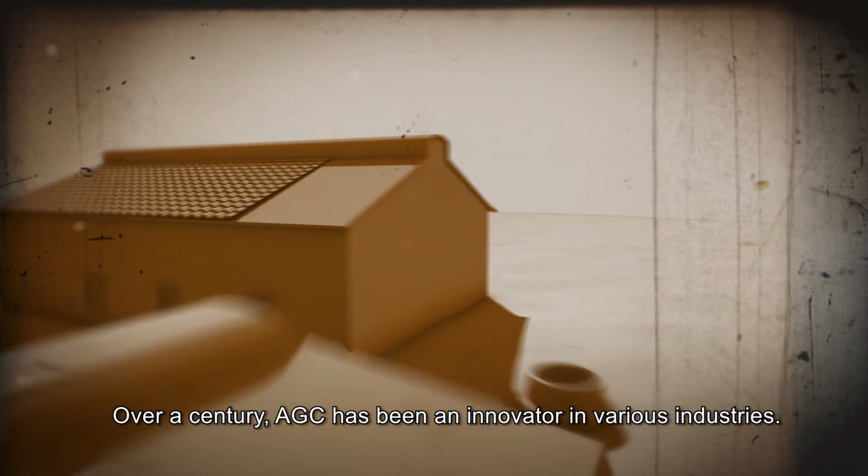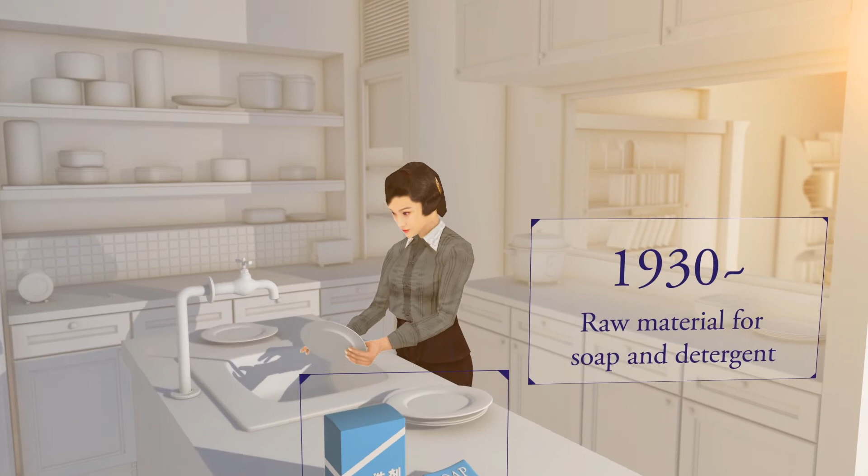Over a century, AGC has been an innovator in various industries. We've brought comfort to people's homes, entertainment into their lives, and we've been helping people get from place to place faster and safer. We have brought communities together with our products.

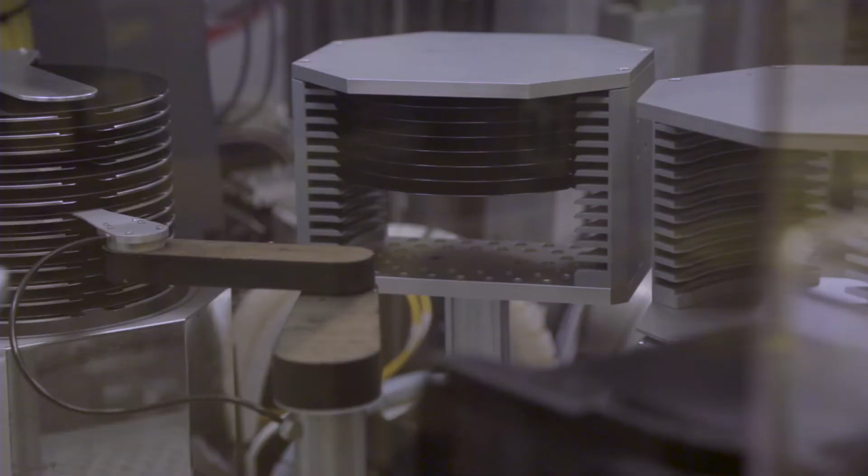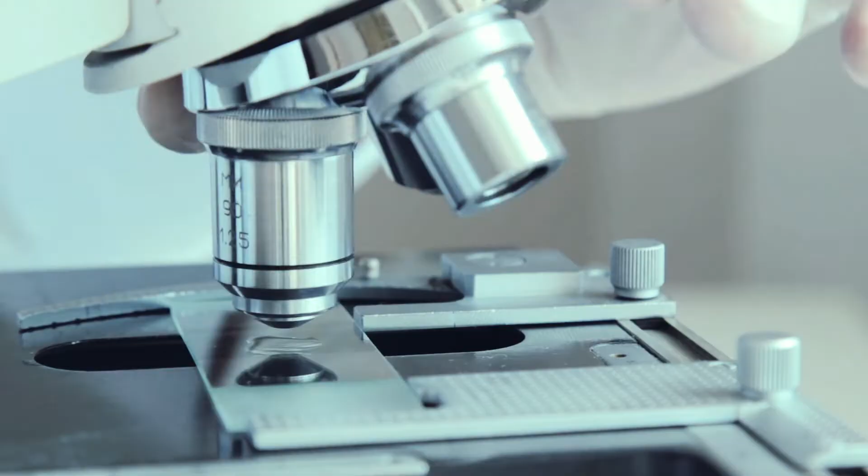We offer a wide range of materials such as glass, electronics, chemicals, and ceramics, and operate in over 30 countries and regions with over 50,000 employees, working to provide essential products for day-to-day life. Our research and development team strives to achieve a better society and standard of living.

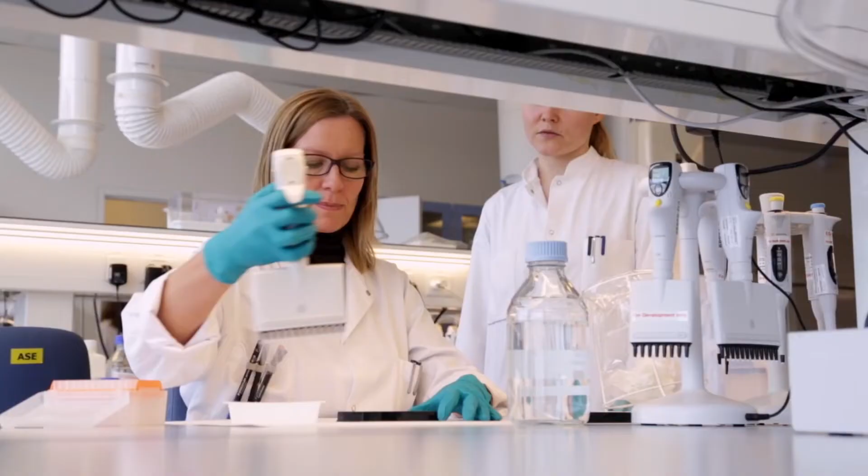At any point in time, AGC has played a part in supporting society, providing unique materials and solutions. Our glass is used in buildings and vehicles around the world. Our chemicals business offers a wide range from daily products such as baking soda to materials used for iconic buildings around the globe, furthermore providing solutions to advanced medical care and expected food shortage issues.

Our display glass enables clearer images. By utilizing a wide range of technology, AGC contributes to the development of the electronics industry. By providing unique materials and solutions, AGC is always around you, supporting people's lives anywhere in the world. AGC, an everyday essential part of our world.

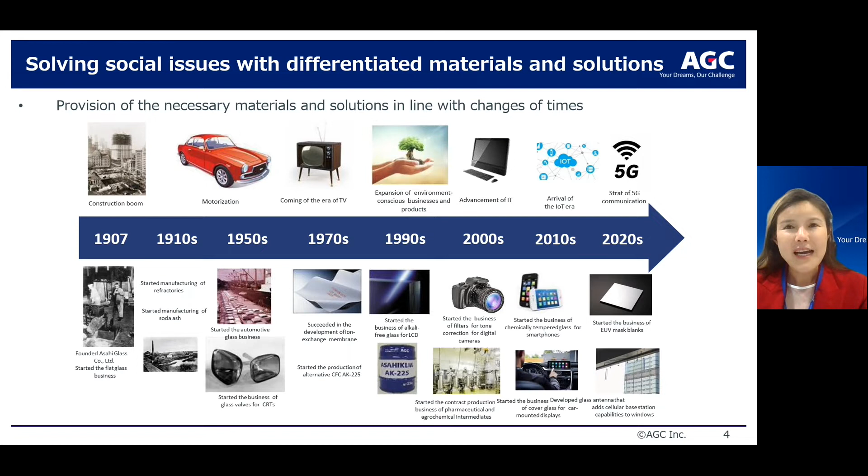Taking a brief walk through our history, since 1907 till date, AGC have provided innovative materials and solutions in line with the changes of time. We have since evolved from Asahi Glass Company, which started out as a flat glass business, to AGC Group, where we have since expanded our businesses to include electronics, chemicals, ceramics, and many more.

With the environment being integral to the company's shared values, AGC continuously and effectively utilize resources and develop products toward the realization of a sustainable global environment. Climate change and effective use of resources are 2 of the risks identified. AGC solutions and products are designed to address these issues, which will be explained shortly in today's explanation. Such efforts then contribute to the United Nations Sustainable Development Goals.

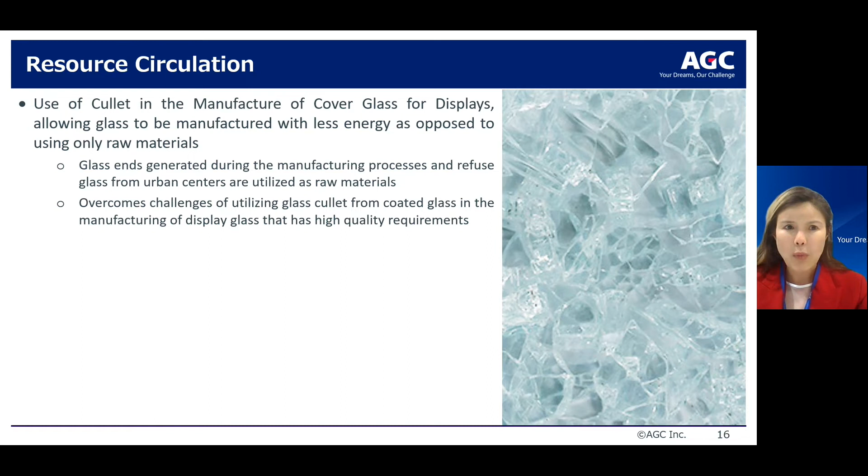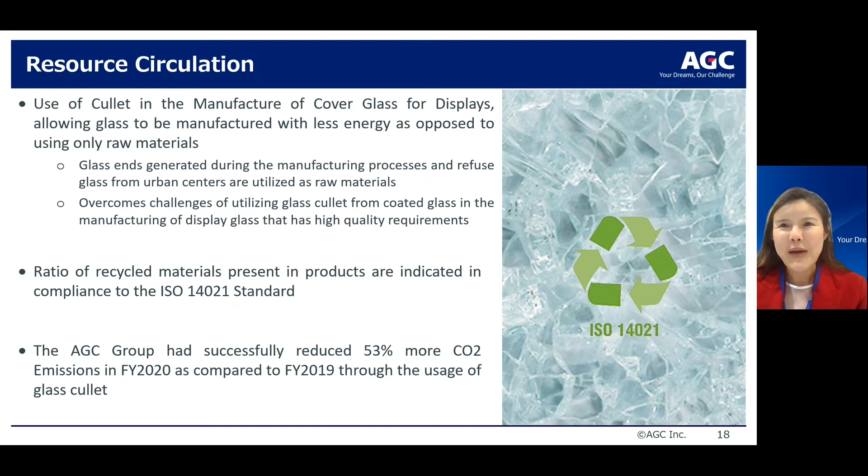The ratio of recycled material present in products is indicated in compliance with the ISO 14021 standard. AGC Group successfully reduced 53% more CO2 emissions in 2020 compared to 2019 through the usage of glass cullet.

Calcium fluoride is a natural resource used as a raw material to produce various fluorinated products. But the deposits and producing countries are limited. Most Japanese enterprises, including AGC Group, largely depend on imports from China.

Another key effort that AGC Group has undertaken is to recover used fluorocarbon products from customers and recycle them at AGC Chiba Plant, Japan. A byproduct generated from the destruction and manufacturing process is calcium fluoride.

We also recover calcium fluoride in the hydrofluoric acid, which is used in the wastewater treatment processes by customers. In recognition of these activities, AGC received the Minister of Economy, Trade and Industry Award in the Awards for Resources Recirculation Technologies and Systems in 2014 in Japan. In 2019, fluorocarbons equivalent to approximately 1.34 million tons of CO2 were recovered.

In the past, used refractories would be buried as waste. However, as part of AGC's key efforts to reduce the consumption of natural resources, refractories are now reused as aggregate raw material for monolithic refractories by removing impurities from refractories soon to be disposed of. A granular material is recovered after crushing and pulverizing.

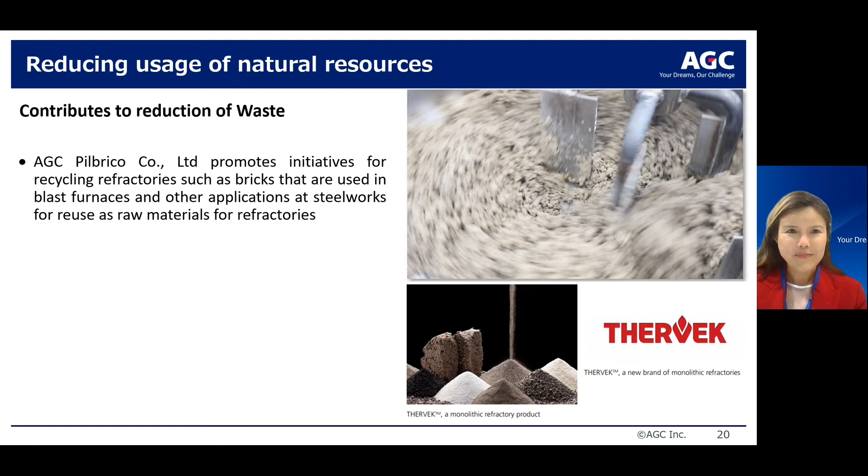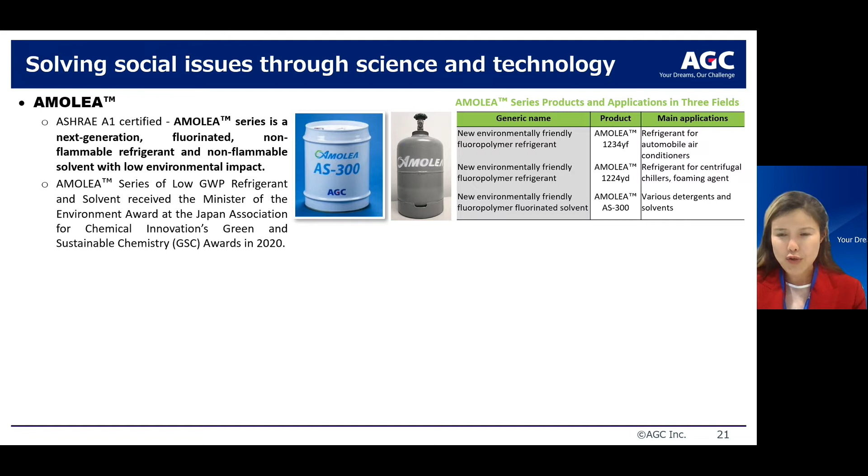In response to the need to balance realizing low global warming potential while maintaining energy consumption and energy conservation performance of refrigerants for air conditioners, AGC has created AMOLEA products that contribute to the environment. This AMOLEA is a next-generation fluorinated, non-flammable refrigerant and non-flammable solvent with low environmental impact while keeping high performance effect. AMOLEA series received the Minister of the Environment Award at the Japan Association for Chemical Innovation Green and Sustainable Chemistry Awards in 2020.

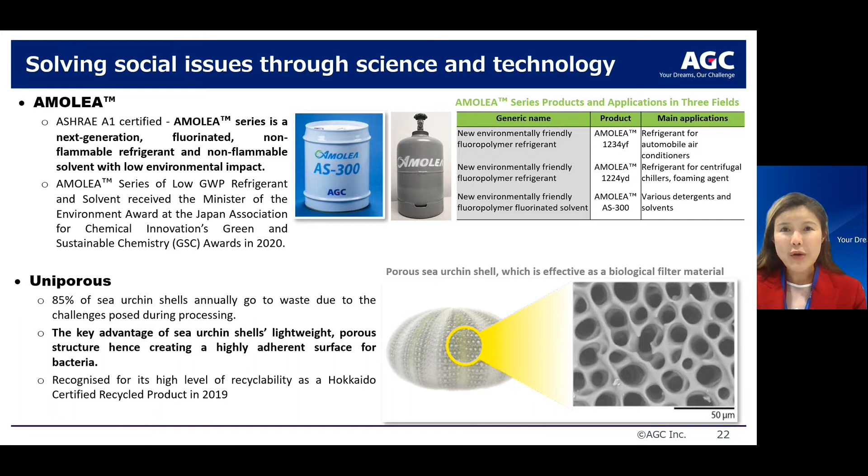Uniporous, on the other hand, is a biological filter made from sea urchin shells. 85% of shells go to waste yearly due to the challenge and time required during processing. We aim to resolve these social issues with cooperation from the Fisheries Research Departments of the Hokkaido Research Organization. Uniporous was recognized for its high level of recyclability as a Hokkaido Certified Recycle product in 2019.

In a bid to reduce freshwater consumption, AGC Group is promoting wastewater recycling alongside a reduction in clean water usage and wastewater through water filtration. As part of our efforts to prevent water pollution, we have established wastewater control targets tailored to the characteristics of each site.

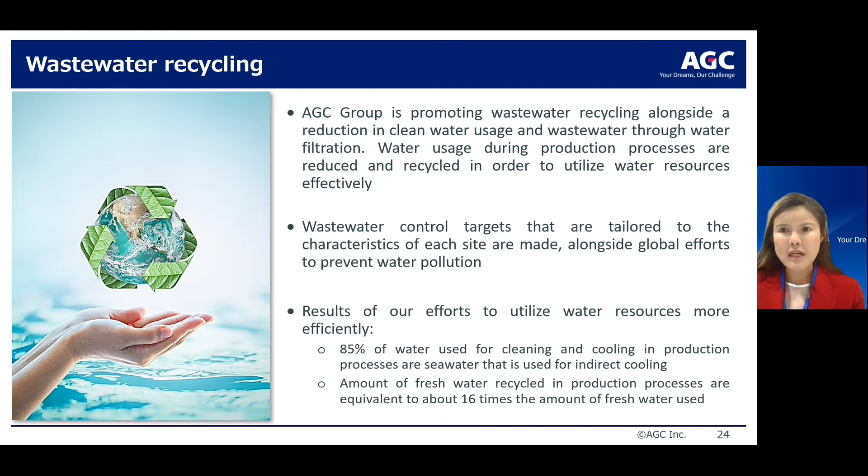These are the results of our efforts to utilize water resources efficiently. 85% of water used for cleaning and cooling in production processes is seawater used for indirect cooling. The amount of freshwater recycled or cascaded in the production process is equivalent to approximately 16 times the amount of freshwater used.

AGC Group has long been proactively carrying out a wide range of energy-related activities, one of which is the photovoltaic power generation project to realize energy saving and creation at AGC plants and office buildings. In 2020, 5.05 million kilowatt-hours of power was generated by solar panels installed in Europe, and 25,000 kilowatt-hours of power was generated by solar panels installed in Japan.

AGC's subsidiary has also installed a biomass boiler to provide steam to its plant's production line. These activities contribute to the AGC Group's efforts in utilizing renewable energy worldwide.

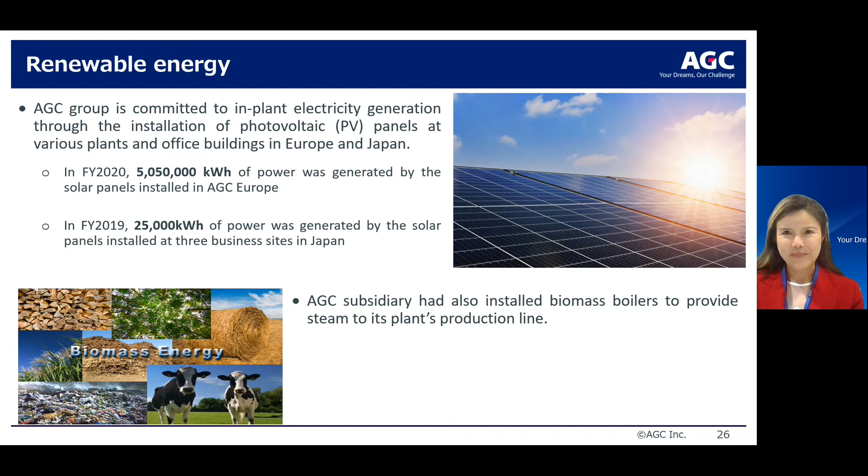In summary, as part of AGC's commitment to creating a sustainable future, we have outlined the fundamental approaches as follows. Number one, establish a long-term goal of achieving net zero greenhouse gas emissions by 2050. Number two, promote zero landfill and continue steady progress to reduce the amount of waste generated. Number three, expand the promotion of renewable energy at business sites of group companies. Number four, proactively promote energy conservation in manufacturing processes. Number five, introduce cogeneration systems to maximize the use of energy. And lastly, provide products and solutions that contribute to energy savings and generation, also contributing to the mitigation of climate change overall.

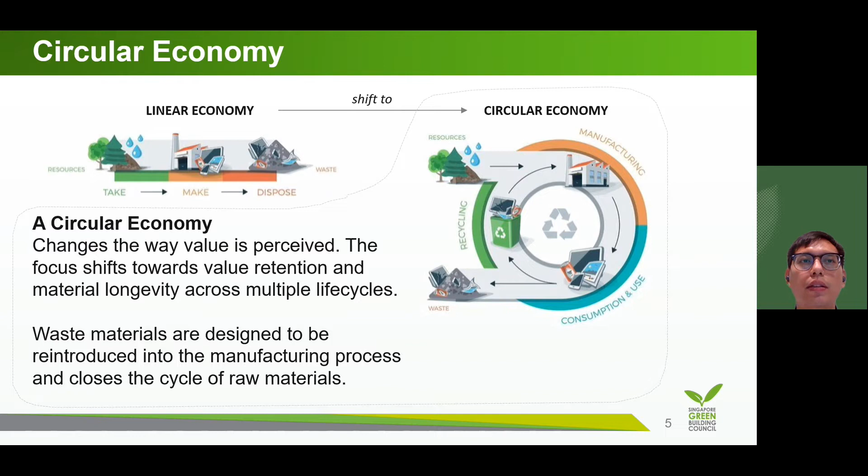But let's move on and discuss what a circular economy model is. Circular economy changes the way value is perceived. The focus shifts towards value retention and material longevity across multiple life cycles. How do we do this? We do this by using waste materials and reintroducing them into the manufacturing process. This actually closes the cycle of raw materials and extends the lifespan of materials.

I like this picture on the right because it paints a more realistic picture. After manufacturing and the use stage, any materials that can be recycled are reintroduced back to the manufacturing stage. But this picture realistically shows that a certain amount of waste has to exit the cycle, and a certain amount of fresh raw materials and resources have to enter the cycle. So the big question for us is: how do we maximize the amount being recycled? How do we minimize the amount of waste exiting the cycle? And how do we minimize the amount of fresh resources entering the cycle?

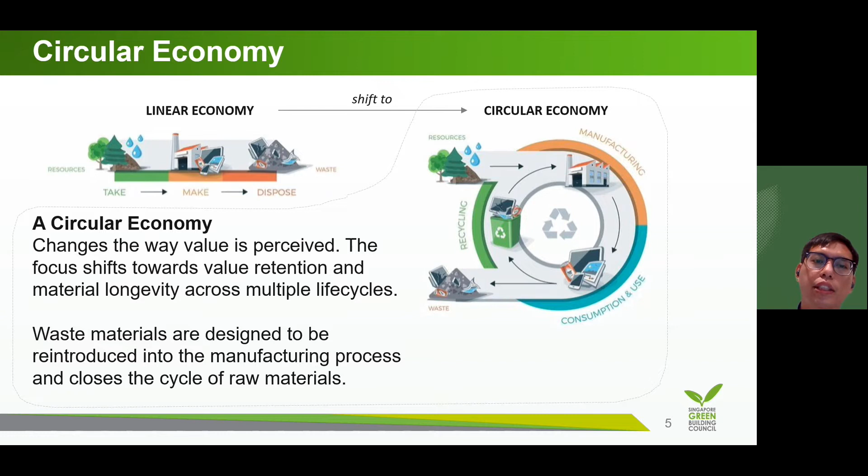So this is the big challenge of circular economy, and it's all to address these purposes: resource scarcity, keeping resources in use, giving them multiple lifespans, and using them more efficiently. In doing so, we reduce waste and reduce environmental impacts.

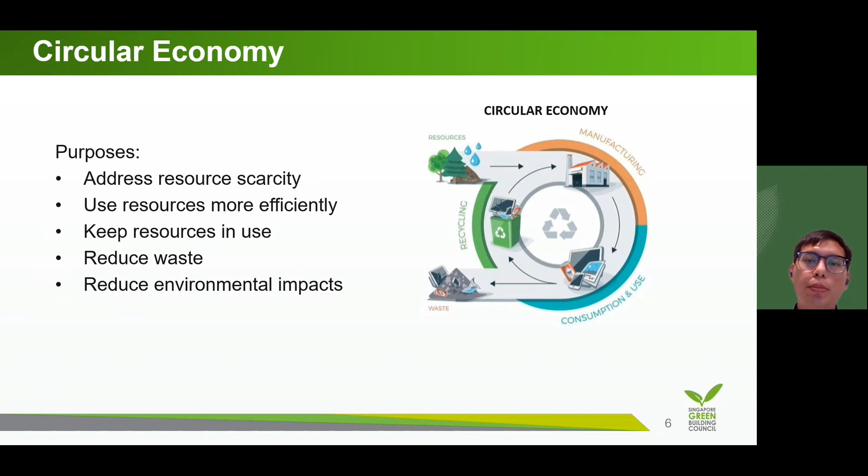So NEWater was actually launched in 2003, for any used water from households and industries.

This water is actually reclaimed and captured before being purified through a three-step process. The purified water at the end of it will be reintroduced into Singapore's water supply.

This caused quite a stir when it was first launched. Used water also refers to human excretion or urine, so it was a big item of debate. Much of the population was skeptical, some were fearful, some were disgusted, but we have gone through many stringent tests. It is actually of the highest purity.

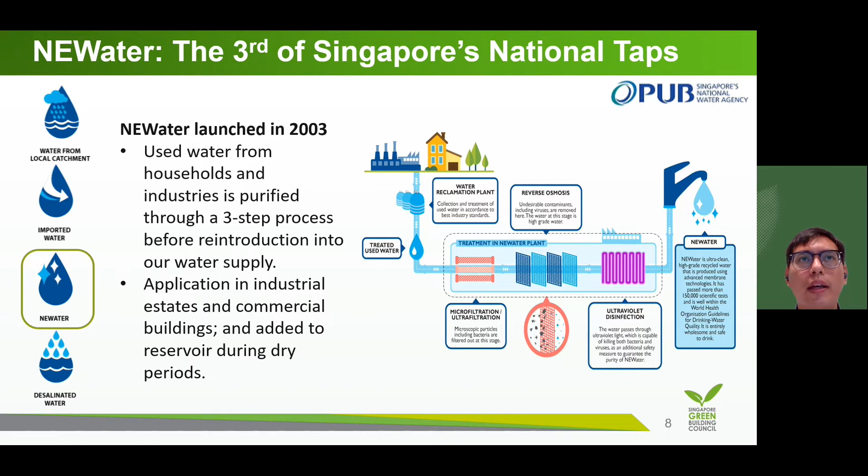How important is it? Today, the daily use of Singapore's water is about 430 million gallons per day. NEWater can account for up to 40% of that demand, and desalinated water about another 25%. 50% of it comes from imported water, like I was sharing, through our agreement with Malaysia.

The balance comes from our local catchment. For us, this is a very strategic national resource. We are putting up capabilities to further refine and improve the NEWater and desalination processes. By 2060, we target for NEWater to meet 55% of water demands and desalinated water to meet 30% of water demands.

2060 is a very critical date because the water agreement we have with Malaysia actually ends in 2061. And for those who are more politically inclined, following the news in our region, historically this has been a very, let's say, tricky situation between Singapore and Malaysia. So apart from meeting circular economy goals, this item is also one of national importance to talk about.

self-reliance and ensuring that we have our own form of water supplies. So you can see that NEWater improvement is about 15 percentage points versus desalinated water's 5 percentage points. The reason for this, I think, is what we discussed earlier - circular economy, how to minimize the amount of fresh resources being introduced.

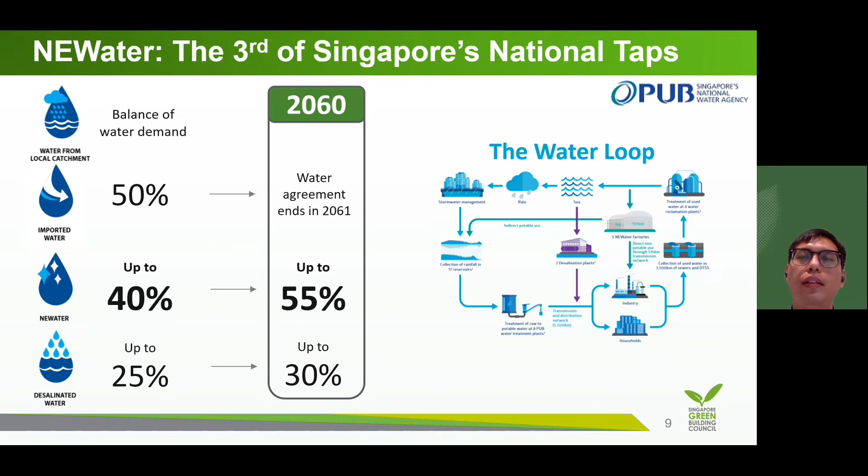Comparing against a baseline of treating rainwater from our local catchments, the energy used for desalinated water is actually about 17 times that. In comparison, NEWater is only about 5 to 6 times that. So this is also another key reason why NEWater is a better case study - we not only address the circularity aspect, we also address the use of fresh resources entering the cycle.

So I hope that paints a nice picture for the water aspect. Let's move on to case study 2, recycled concrete aggregates.

Recycled concrete aggregates are raw materials used in the production of cementitious and concrete products. You have your OPC, ordinary Portland cement, you mix in concrete aggregates, concrete fines and other things to produce concrete. With recycled concrete aggregates, we don't need to use as much raw or virgin aggregates. Before we jump into it, let's talk a little bit about the demolition protocol in Singapore.

The demolition protocol is part of the Singapore Standard 557, 2010 edition, Code of Practice for Demolition. It's been around since 2002 under a different name, but the key items here are the pre-demolition audit, the sequential demolition, and the site waste management.

When a building is identified for demolition, we actually have to conduct an audit or inventory stock-taking in order to identify what materials are reusable, what materials are recoverable, how much has been contaminated, and what has no choice but to be disposed of. These materials include things like pipes, wiring, concrete, bricks, and so on and so forth.

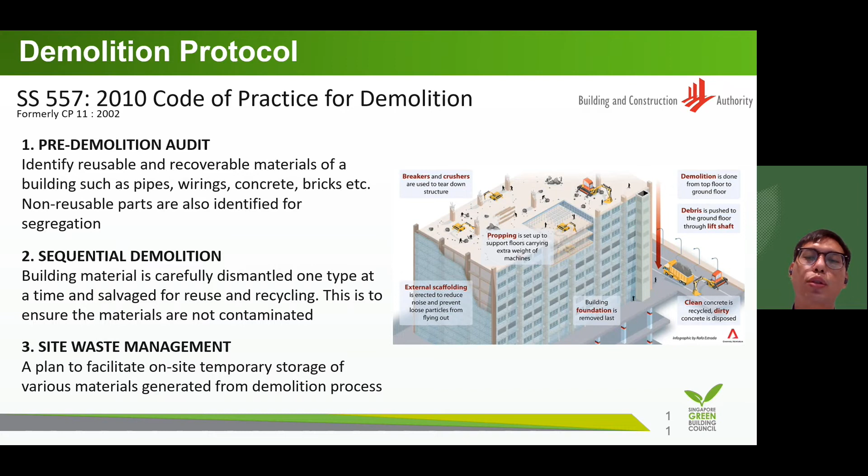So you can imagine, in terms of the concrete debris that comes from all our demolished buildings, these can be collected, compiled, and then transported to treatment facilities. Over here at treatment facilities, they are broken down through things like excavators and jaw breakers. And at the end of this breakdown process, we can screen, segregate, and come up with aggregates and fines.

So like mentioned, these aggregates and fines are actually raw materials in the production of concrete and cementitious products. Initially, when we first derived such material, we used them in roads and other non-structural concrete product applications, whereby structurally it's not as significant.

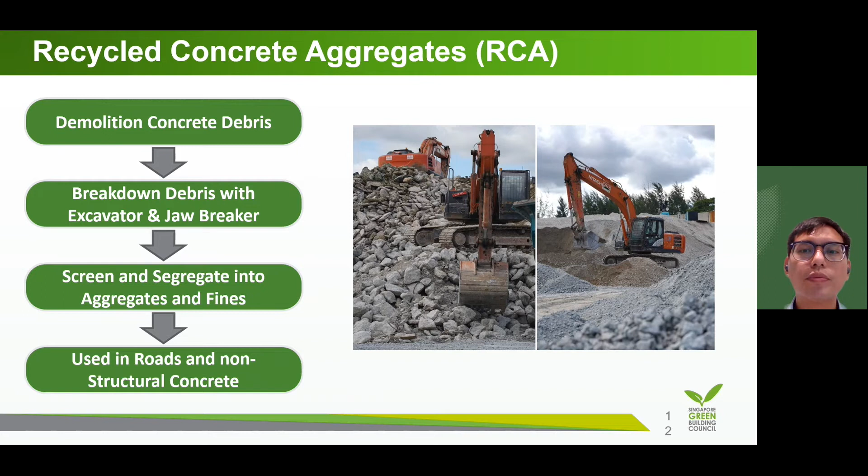But we didn't stop there. We took it one step further. We thought to ourselves, how can we incorporate RCA, how can we make better use of it, maximize the efficiency of this raw material. And all that thinking and questioning led up to the Samwoh Eco-Green building in 2010.

So Samwoh is a local company. They are builders, involved in construction. And what they did was lead a research project in collaboration with public agencies and institutes of higher learning - that is the Ministry of National Development, the Building and Construction Authority of Singapore, and Nanyang Technological University. So multiple stakeholders were involved in this research project, and what they focused on was evaluating the performance of concrete that contains recycled concrete aggregates.

So one of the key findings is that if you compare traditional concrete versus a concrete that contains RCA, there actually is an insignificant amount of differences. When they looked at the structural monitoring results as well, the deformations that the RCA concrete shows fall within theoretical deformations. So these were all very good findings, and the study concluded that RCA concrete can be designed for structural applications beyond the roads and non-structural products we've talked about before.

So from this point, Samwoh brought to reality the findings of the study. The Eco-Green building is constructed using RCA concrete. So any of the cementitious or concrete elements found in this building are actually not your typical concrete - these are RCA concrete instead. And in certain cases, the aggregates used would be up to 100% recycled concrete aggregates, so zero use of fresh virgin aggregates in those cases.

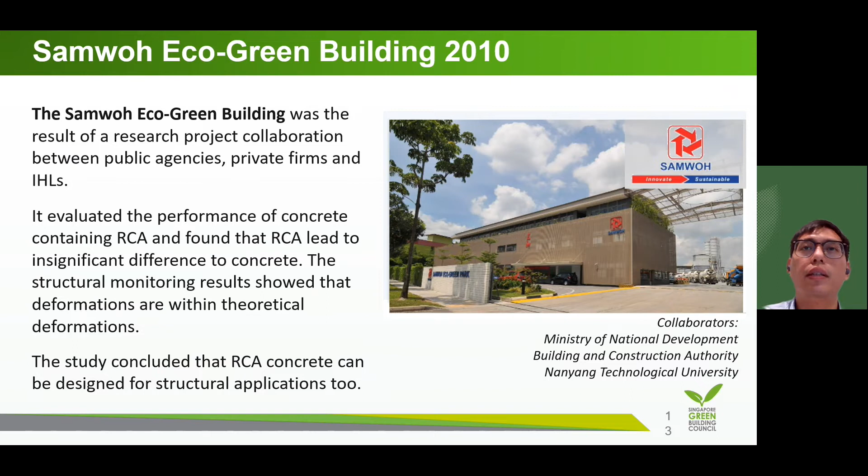So I hope this has painted a nice picture for Singapore's application of circularity principles in the water sector and the use of RCA. Now let me move on to the resources aspect of this webinar series and the use of environmental product declarations. I started with circularity first because although it is a very good thing, the thing of the future, we need to bear in mind that unlike water, unlike RCA, not all products or product categories can make that jump to a circular economy model so rapidly or so quickly, right?

So we're stuck with a lot of products that's still in the linear economy model. The thing is, we can't not care about them, we can't leave them aside. We have to ask, how can we improve this, right?

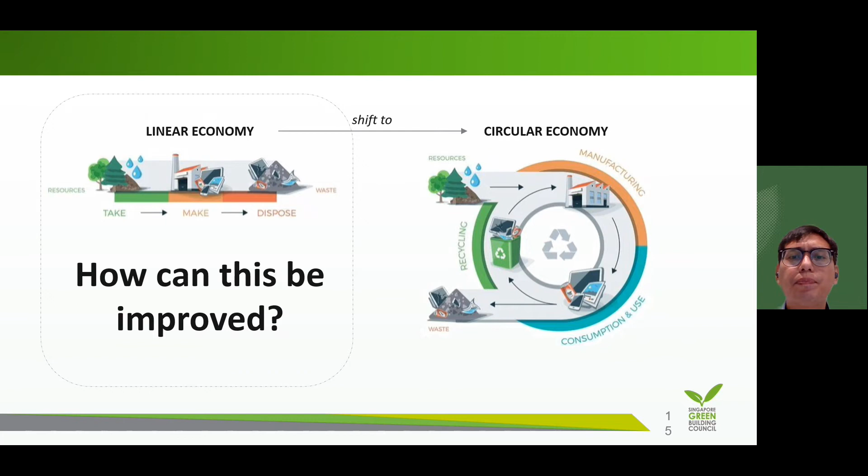So compounding on this question, we also talk about carbon emissions of the building sector. Globally, buildings account for 39% of global carbon emissions, and it is a building challenge, a mega trend, a carbon mega trend, right? And we've talked about buildings, we can further break them down into embodied or upfront carbon versus operational carbon.

Even locally as well, Singapore is doing a lot from a government standpoint - a lot of schemes, a lot of initiatives, and even putting into regulation the need for higher energy efficiency of buildings. In comparison, the upfront carbon is a little bit overlooked.

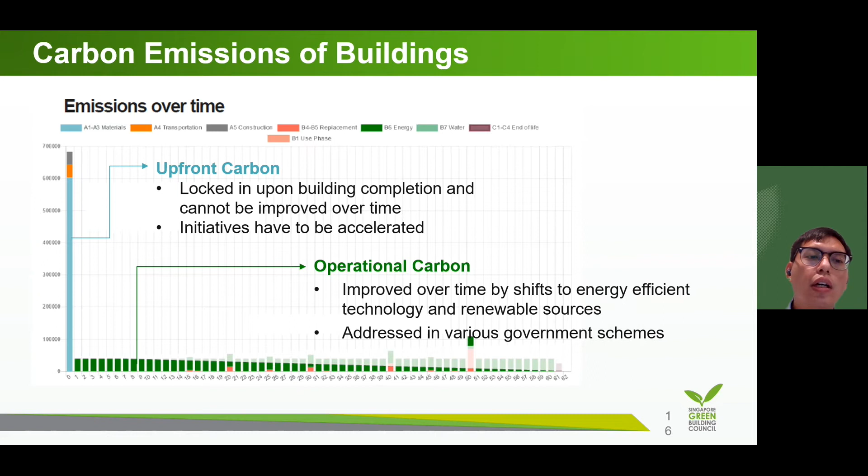So this is where EPDs, or environmental product declarations, come into the picture. EPDs are like healthy food labels that report on the sustainability impacts of products. So instead of things like fat amount, sugar amount, or carbohydrate and protein amount, EPDs tell us about the environmental impacts of products, such as acidification, ozone impacts, GWP, and so on and so forth.

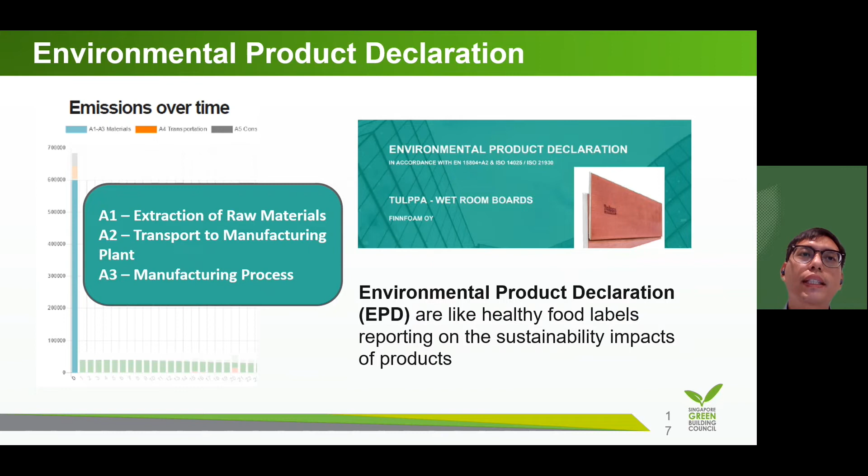What we want to address in terms of the embodied carbon side is these 3 stages, also referred to as cradle to gate: the extraction of raw materials, the transport to the manufacturing plant, and the manufacturing process itself. So EPDs are able to give us a deeper picture of the carbon emissions associated with these 3 stages of products.

So in this case, if you have, let's say, 2 carpet products, if you take a look at the GWP of each of them, you can actually use it to make a comparison to say which of these carpets have a lower carbon impact, and you can make a selection from there.

So going back to the analogy of healthy food labels, if in that category you are a dietitian or a chef, you can choose your ingredients to make a meal out of. Similar to that, as a project team, an architect or ESD designer, you can choose the materials that go into your building project that have the lowest amount of carbon impact. At the same time, suppliers, when they review their products and maybe compare them against competitors, can find out where the room for improvement is in their processes and product design.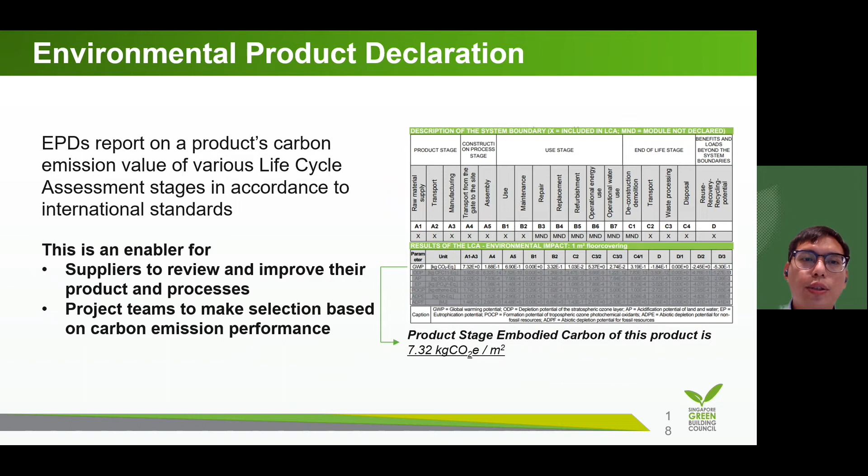So this is a very quick snapshot of environmental product declaration. I can go into a lot more detail on that. SGBC is advocating for the use of EPD locally, but due to time constraints, this is all I have for today's sharing.

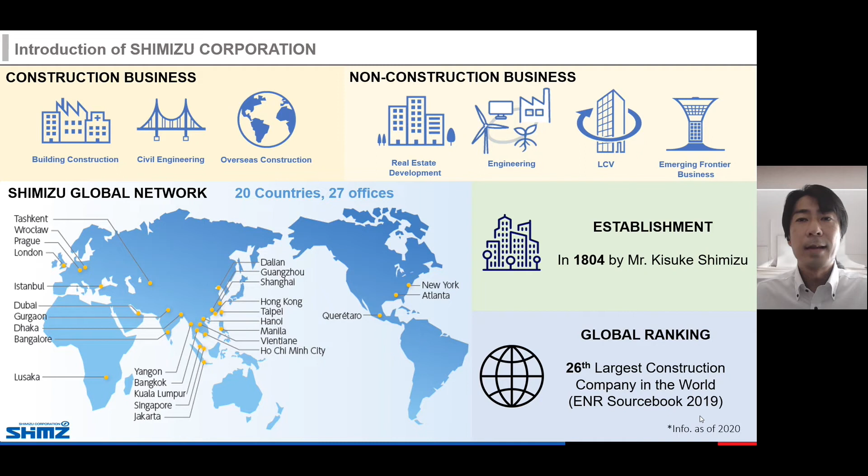First, I'd like to introduce Shimizu Corporation. Shimizu's main business is building construction and civil engineering, with branches in 20 countries. Shimizu was founded in 1804, 218 years ago. As of 2020, we are the 26th largest construction company in the world.

Shimizu Beyond Zero 2050 is our target to create a sustainable society, providing positive environmental value to customers and societies that extends beyond zero negative impact from the company's own business activities. Shimizu Group will create a wealth of environmental value through an innovative approach from three perspectives: zero carbon society, resource recycling society, and a society that coexists harmoniously with nature. We are not questioning ourselves if we can achieve this or not, but we are committing ourselves to achieve net zero emissions, final waste zero, and zero negative impact on the environment by 2050.

Zero carbon society: it is our responsibility to eliminate CO2 emissions by 2050. Since 2005, we have set CO2 reduction targets to tackle middle-term and long-term effects. As a design and build contractor, we contribute by designing buildings with this aim, driving society towards zero carbon with technological innovation and generating power from renewable energy.

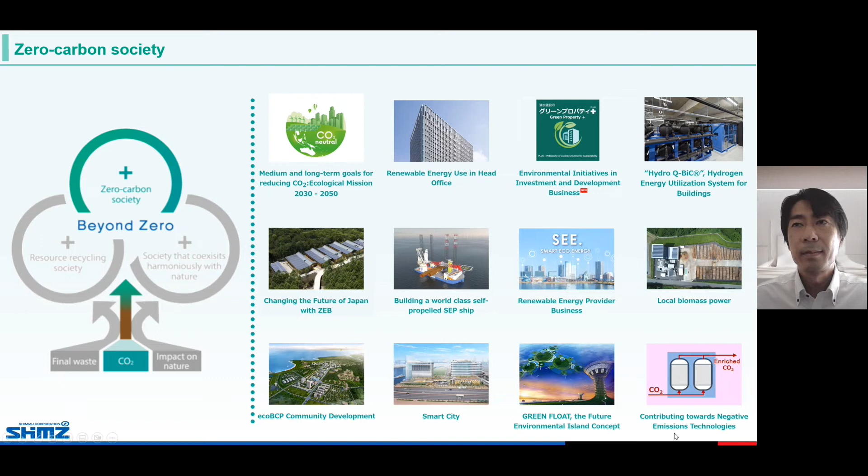Society that coexists harmoniously with nature. The construction industry tends to be perceived as having a negative impact on the natural environment, such as land development and deforestation. By 2050, we aim to quantify the impact and accomplish zero negative impact. To achieve this, we will keep a rich environment that has a positive impact on biodiversity for future generations by introducing green infrastructure, utilizing the diverse capability of nature in various ways.

Resource recycling society: we aim to achieve zero final waste generated by our own business activities by 2050, including construction and office waste. We continue to work on recycling society resources through the entire construction life cycle, from material procurement to dismantling. Today, I'd like to introduce actual applications of environmentally friendly temporary construction material and resource recycling and waste reduction.

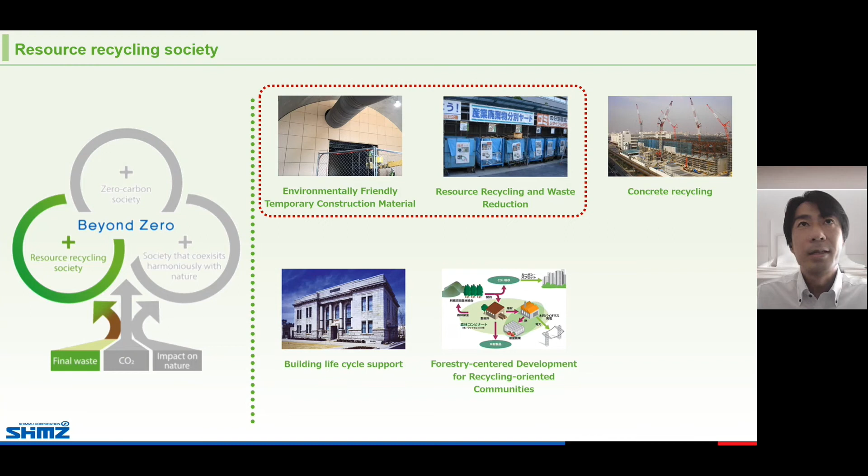The environmentally friendly temporary construction material I would like to introduce is Kamiwaza. Kamiwaza is a solution for temporary construction materials at civil engineering sites that uses paper materials made from waste paper and pulps. It was jointly developed with Oji Holdings Corporation. The main product of Kamiwaza is HiPLE-ACE. This product has advantages of easy transport, flexible shapes, space saving, environmentally friendly, high weather resistance, and high rigidity and strength.

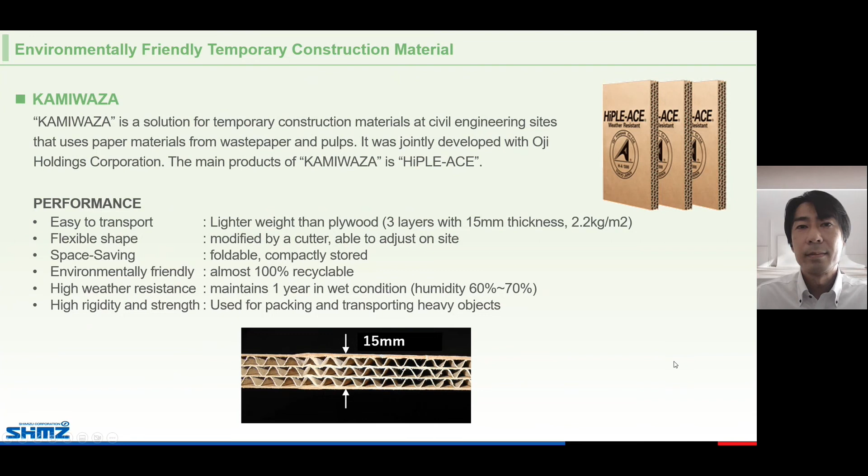This is an example of actual application of HiPLE-ACE. In tunnel construction, we install a windbreak facility called a windgate to prevent outside air from rapidly entering. The conventional windgate is made by inflating nylon balloons, which requires a lot of sequence of work, man-hours, and cost. Thus, we adopted HiPLE-ACE, which has the required strength and is lightweight.

Work efficiency has been improved by pre-cutting and crease processing, with a simple mechanism that just fits the HiPLE-ACE with an L-shaped cut for hooking on the scaffolding. It can be fixed easily and securely. In addition, since the shape and dimension of each tunnel are different, the conventional balloon needs to be disposed of, while the HiPLE-ACE is recyclable, and the shape can be easily adjusted.

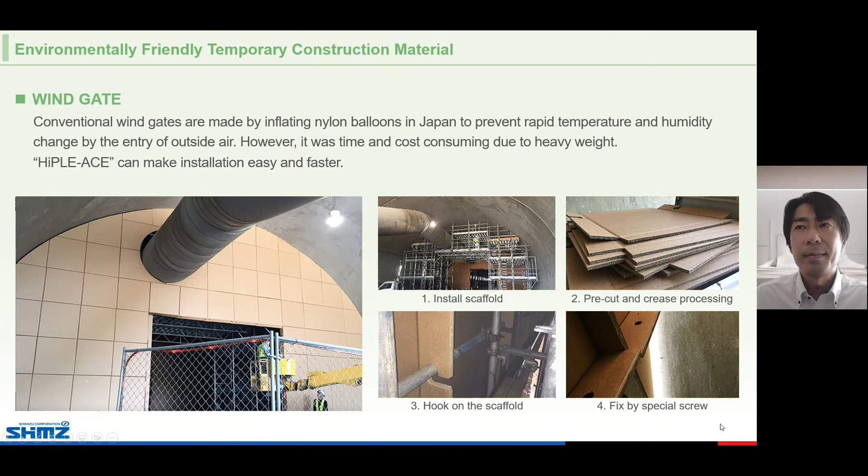Since HiPLE-ACE is a cardboard material with a 3-layer structure, which includes an air layer inside, it has high sound insulation performance. Hydraulic pile hammers generate large noise, and even with a soundproof cover installed, sufficient effect has not been obtained due to sound leak from the opening. Thus, we devised an opening-closing cover that takes advantage of the sound insulation and workability of HiPLE-ACE, designed to minimize the gap between HiPLE-ACE and the outer soundproof cover. Measuring the noise at a position 30 meters away from the hydraulic pile hammer, the noise was reduced by about 5 dB. In particular, in the frequency range of 1 to 4 kHz, the maximum reduction effect was 9 dB.

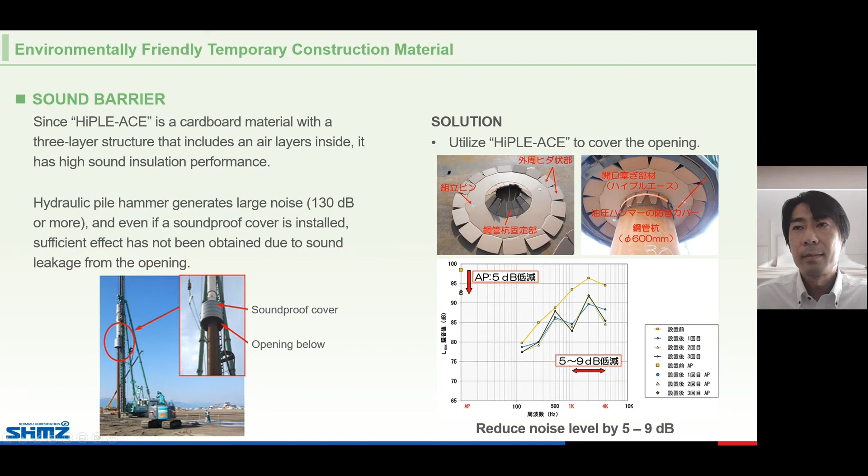On job sites, we plan and promote 4R activities. 4R consists of the initials of 4 words: refuse, reduce, reuse, and recycle. For example, requesting product delivery with a packageless method, pre-cutting at the factory, and bringing waste material to a manufacturer for recycling products.

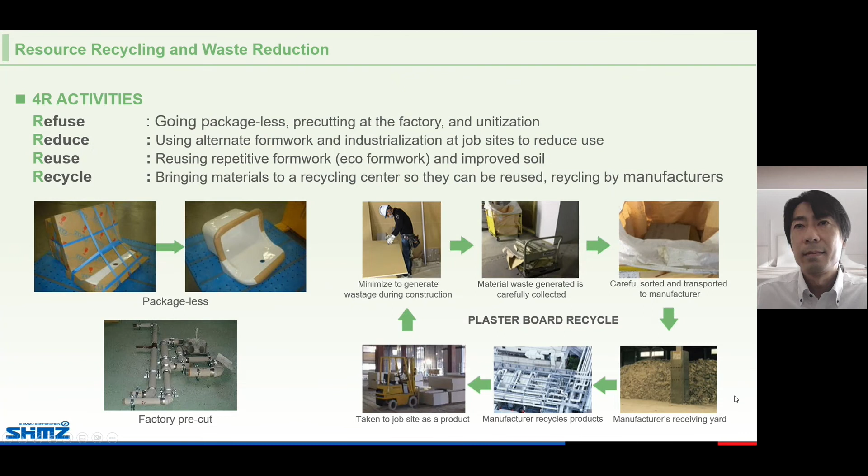There's one project in Japan promoting high recycling construction. With a large-scale renovation work of an existing facility in Tokyo Big Sight, the existing exhibition hall would be unavailable to use for 10 years. Thus, a temporary exhibition facility was planned to set up a system in which events can be held continuously. We were selected as a design and build contractor after the open tender with a comprehensive evaluation.

As the building is to be demolished in about 10 years, we proposed minimizing the environmental impact during construction and demolition, and an eco-friendly building with a high recycle rate.

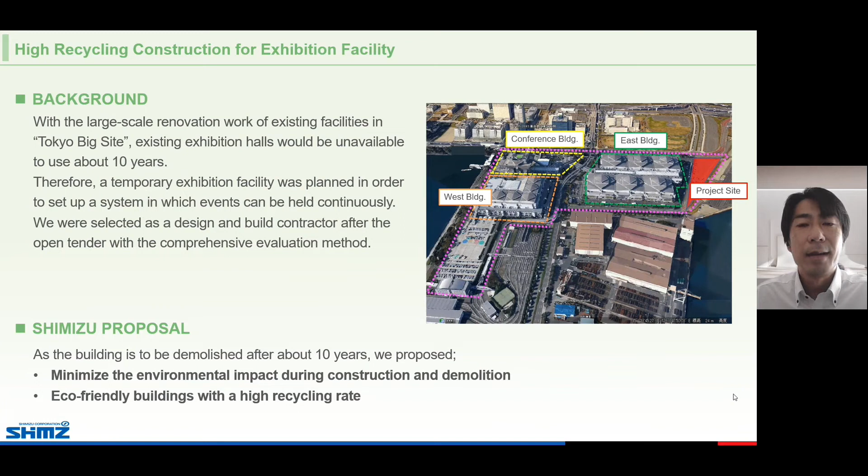Here is the project outline. Location: Tokyo, Japan. Construction schedule was November 12, 2015 until October 9, 2016. Building use was exhibition hall. Total floor area: 19,905 square meters. Building height: 16.4 meters. Two-story building, superstructure by steel structure. Foundation: pile foundation, with metal roof and external wall of ALC panel.

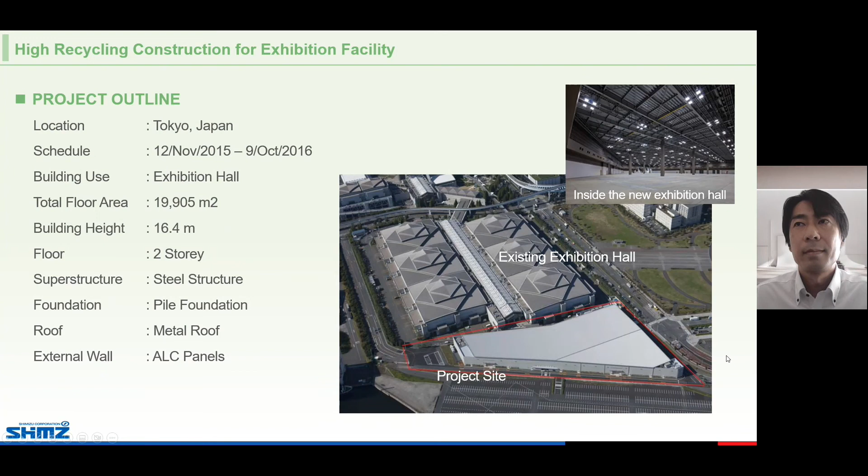Total construction period was 11 months. We constructed the roof and external wall in advance prior to the slab casting and subsequent finishing and M&E works, so that noise and dust could be minimized. By following the reverse sequence, a similar effect could be expected during the demolition work in future.

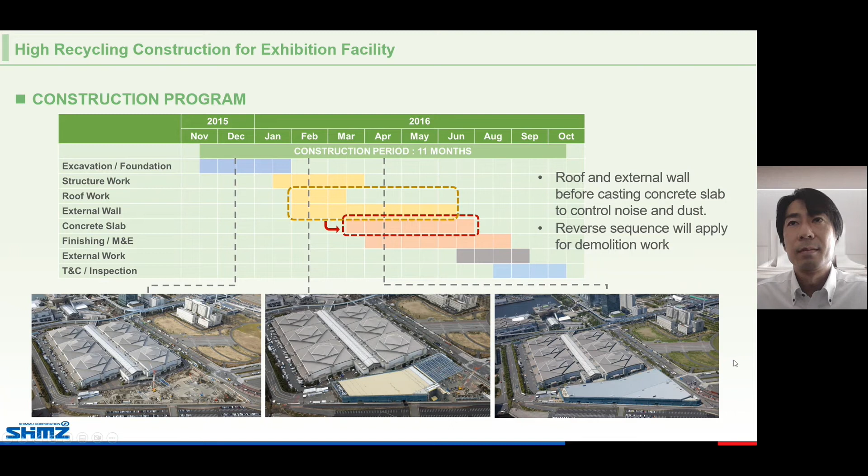This rotary press-in steel pipe pile is a method in which steel pipes are pressed in while rotating, and they can be easily pulled out by rotating them in the reverse direction when dismantling in future. This is an environmentally friendly method that minimizes noise and vibration and generates less waste. The use of steel pipe piles also allows us to reuse and recycle 100% of steel pipes after they have been pulled out.

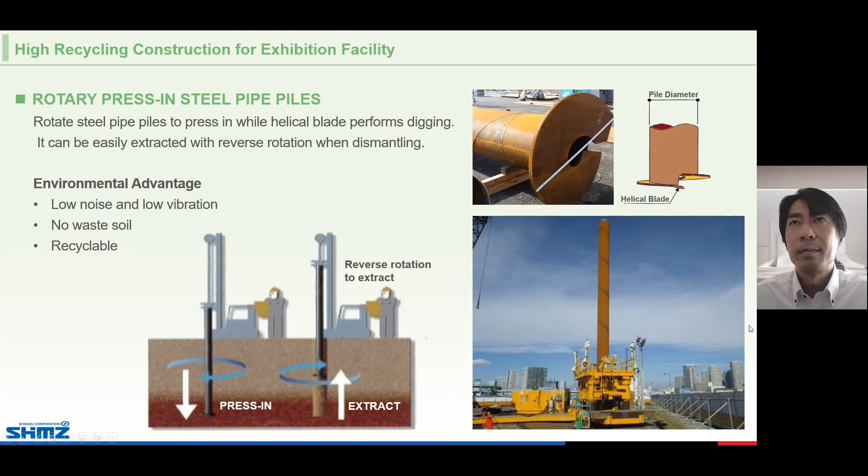The pile head ring socket construction method is our unique patented construction method. This method surrounds the steel pipe pile and steel column base with ring sockets, filling the gap with concrete to integrate them. Stress at the bottom of the column is carried by the pile so that ground beams can be omitted. As a result, the volume of excavation soil and concrete can be reduced, resulting in reduction of CO2 and waste.

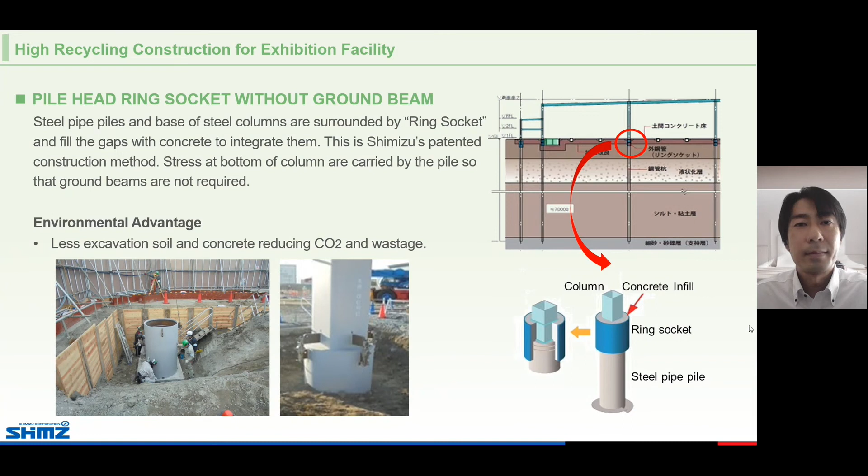2,650 tons of steel frame of the wall are designed as a hanging structure to cope with ground settlement. 8,760 square meters of external wall are formed with ALC panel and metal cladding. 17,000 square meters of roof is double layer metal roof with glass wool sandwiched in between.

All the materials selected for the superstructure are recyclable, while satisfying the strength and resistance of building standards. The structure was designed as simple as possible to ease dismantling work.

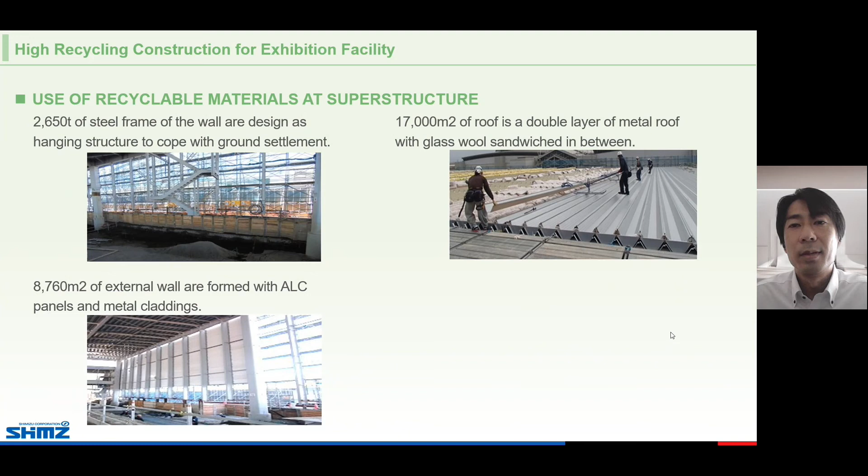We encourage suppliers to deliver products with cage trolleys to reduce packaging. Pipes and M&E equipment are prefabricated together with steel frame in a factory to deliver with minimum packaging. By simplifying packaging, we are able to reduce CO2 emissions and industrial waste.

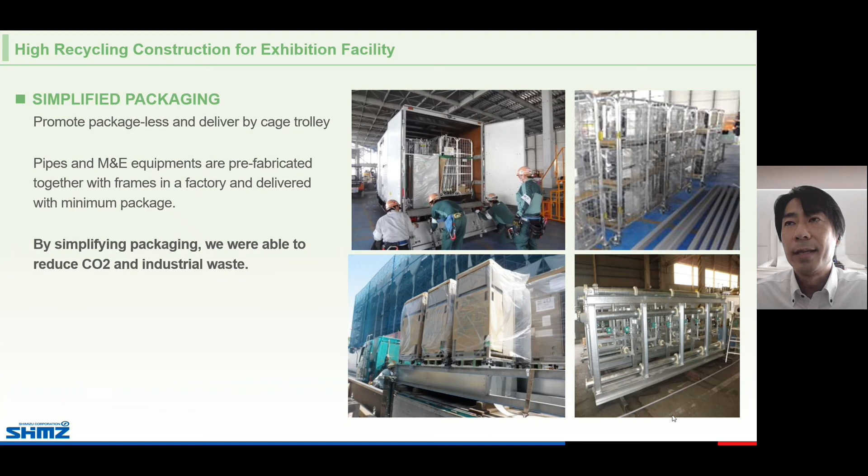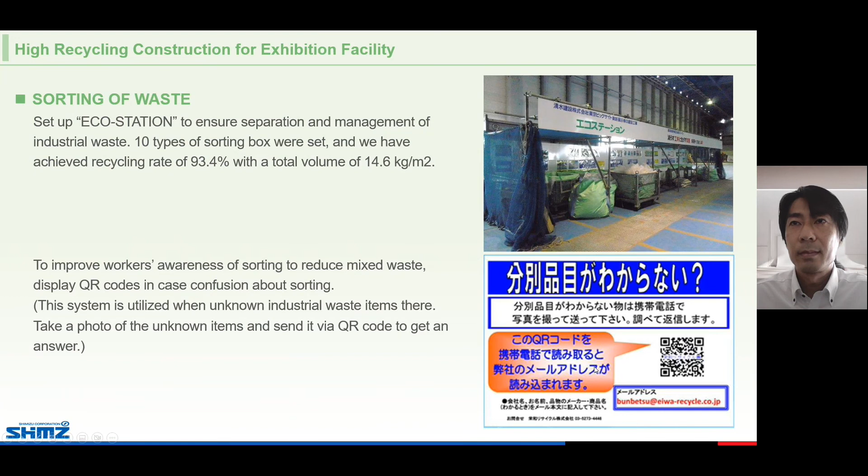Today, I could only introduce a part of our activities. From our activity, SHIMZ aims to contribute to a positive world that achieves beyond zero. That is what we want to build for people living now and the children who have a right to thrive in future.

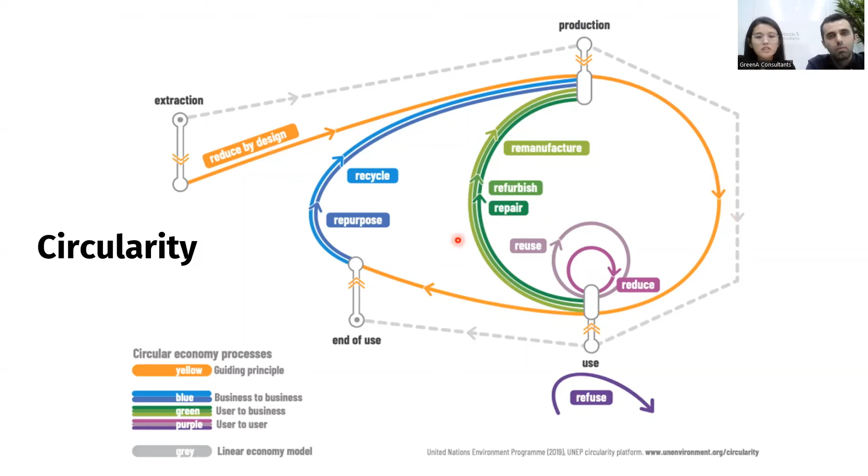Circularity is a term often heard in the field of sustainability. In the traditional whole life cycle of products, they actually enter a linear economy model where raw materials are extracted, manufactured, processed, distributed, and then used by the end consumer, after which they are thrown away and incinerated. This is wasteful because most products are still in good condition or are only used for a short period of time. Fortunately, circularity is now more incorporated into the thought process, where reduction by design, reuse, refurbish, repair, and repurposing are increasingly encouraged, helping to extend the lifespan of a product.

Applying this to a city scale, how our cities work, we call this urban metabolism. Why? Because we perceive cities as a living organism or a living being. With inputs of resources, these are then used to sustain the living conditions of society - economy, waste, water, and energy flow. So here we can see two very important flows: materials as well as energy.

Then our own input, which is reduce, reuse, and recycle, to minimize waste going to the outputs. We will be looking first at pollutants, secondly at waste. In most cases, practically, we don't see recycling happening, or we don't see these backflows happening as such. But for now, we just want to focus on the impact of this pollution and waste.

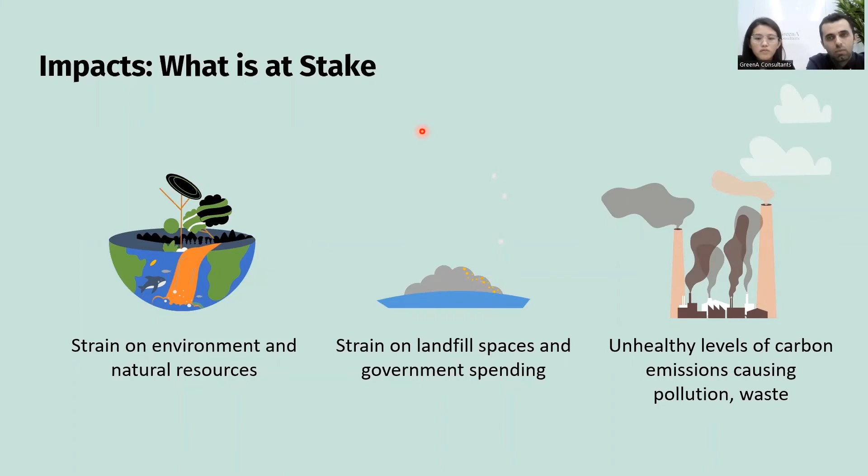If circularity is not adopted in the built environment and buildings, there will be strain on the environment and natural resources, strain on landfills and government spending as well. And there will be unhealthy levels of carbon emissions, which is already happening, causing more pollution and waste.

So how does this actually apply to a building's life cycle? In the typical life cycle of a building, we actually see 5 main stages. First is design and planning. Second, construction of the building. The third, a building in operation, meaning when it's already a living building. And the fourth, addition and alteration, where they go through retrofitting after maybe 20-30 years, and demolition and disposal at the end of their whole life cycle.

We do see that we try to address circularity in terms of energy, water, and waste in the entire life cycle of a building. In design and planning, there are project teams that actually set boundaries on embodied carbon, and increasingly there are more and more guidelines on maintenance to actually prolong the lifespan of the building.

Secondly, under construction of the building, we see that there are actually thresholds being set to contain the amount of embodied carbon in structures, foundations, floorings, and also the encouraging of use of low carbon materials such as certified products. And in the operation of the building, we see energy efficiency being improved through HVAC systems, encouraging circular water management, having waste management for recycling and disposal, and also this thing called IoT for climate, where sensors and monitoring are used to further mitigate carbon.

In the addition and alteration stage, new technologies will be added in. In the last stage, demolition and disposal, we see demolition protocols to reduce waste during demolition, and ensuring recycling happens at that stage. So all this is actually trying to address circularity in the life cycle of a building. It's the typical life cycle where in each stage there are already standards and certifications or guidelines being used to guide the process itself or to ensure quality.

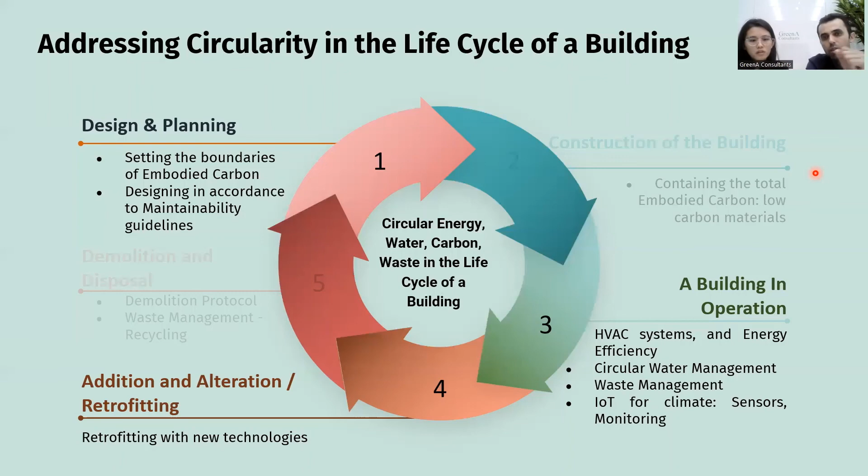So in the next section, we will talk about the major certifications that we are all using and how each certification addresses circularity in the built environment. In this presentation deck, we'll go through 5 different certifications: BCA Green Mark, LEED, TRUE, ILFI, as well as WELL.

Under Green Mark 2021, one of the latest standards under this scheme, there are 5 main categories: resilience, health and well-being, whole life carbon, maintainability, and intelligence. Energy efficiency is a prerequisite. Under this standard, whole life carbon and maintainability focus not just on tracking and recording, but also on how to prolong the life cycle and lifespan of a building.

This is done in the whole life carbon section by measuring the embodied carbon in terms of materials during construction and fit-out. For maintainability, it's like a guideline for designing a building such that it's easy to maintain in the long run.

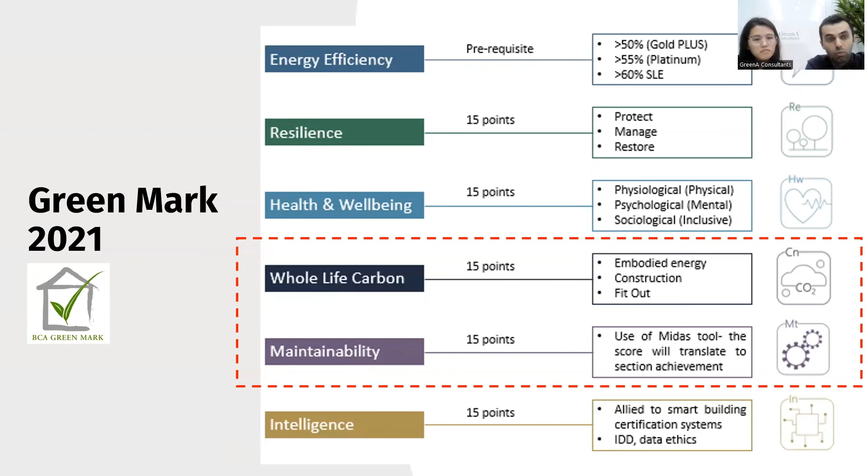The next standard is the USGBC LEED. Most of us might be familiar with this scorecard or how we score with LEED, but my purpose here is to highlight exactly where LEED can address circularity in the built environment. We see that only in some of the credits is circularity really being addressed.

For example, rainwater management contains rainwater on site and avoids runoff from construction sites. There are also energy credits by LEED, through reduction of energy use, which means reducing operational carbon, generating renewable energy on site, as well as purchasing or offsetting carbon through buying RECs. This has a huge impact on circularity when it comes to carbon.

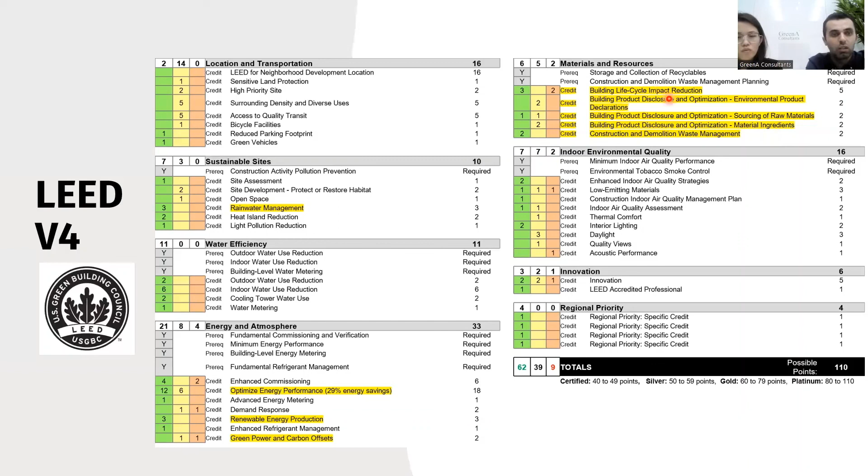The second section covers all the material-related requirements. LEED has a set of requirements including the building life cycle impact reduction, where the building life cycle is simulated and the impact is quantified, and scoring happens accordingly. So LEED mainly covers some under water, some under energy and carbon, and the rest under materials, as well as waste, covered under construction waste.

Under the TRUE certification, which looks at the waste produced during a company or organization's operations, one of the prerequisites is achieving a 90% or greater overall diversion rate for the most recent 12 months. This is one of the most important prerequisites for a company or organization to attain so-called zero waste. The highest is 100%, and the lowest required is 90% and above.

The next building standard is EDGE. Maybe not everyone will be familiar with EDGE because it was a standard developed by IFC to address sustainability in developing countries, which is actually a major topic because most emissions, as we know, come from developing countries, and developing countries are expected to double population by 2050.

So we find this standard really significant. Recently, this standard is targeting zero carbon and also circularity in terms of carbon, by releasing a zero carbon certificate. It works by first having mandatory reduction in energy, water, and embodied energy by 20%, then an additional 20% energy savings, then the rest should be offset by renewable energy, after which you can be awarded the zero carbon label.

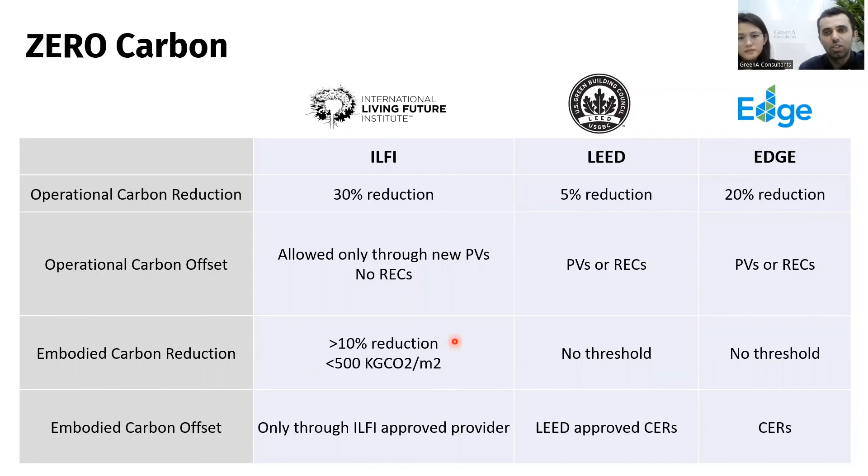So to summarize, we see that some certifications are more stringent than others, which leads us to our next point: on top of the 3 zeros, sincerity is actually the most important ingredient of all.